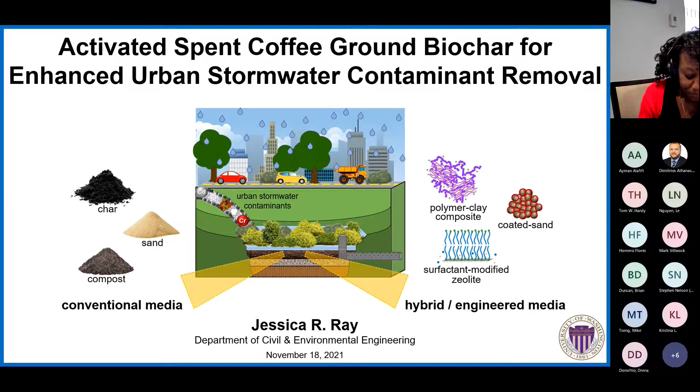To start, I wanted to put this presentation into context, starting with the hydrologic cycle, or the water cycle. When we think about rainfall, the image I think you conjure is one where you have rainfall over nice forested land, and the grass and the soil kind of soak up all the water, and you can have replenishment of groundwater aquifers and stores, this natural flow of the water cycle.

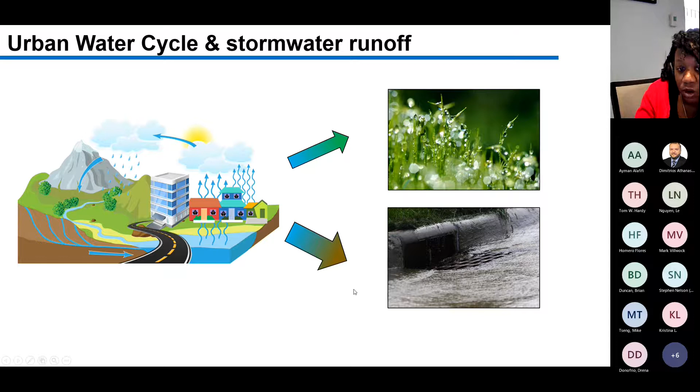But increasingly, a lot of the human population is living in urbanized, densely populated areas. So instead of having this natural hydrologic cycle where you have natural infiltration of rainwater, you instead have rainwater runoff, or stormwater runoff, onto roads that end up in water bodies. So you have less volume of this natural process and more urban runoff. This is especially true in places like Seattle, a densely populated urban area, where we have lots of impervious and engineered surfaces that, when the rainwater makes contact, lead to high volumes of runoff on the streets. And this is not just an issue for Seattle, this is an issue worldwide.

This statistic by the United Nations projects that by 2050, 68% of the world's population is going to live in urban areas. So this is going to be a global phenomenon.

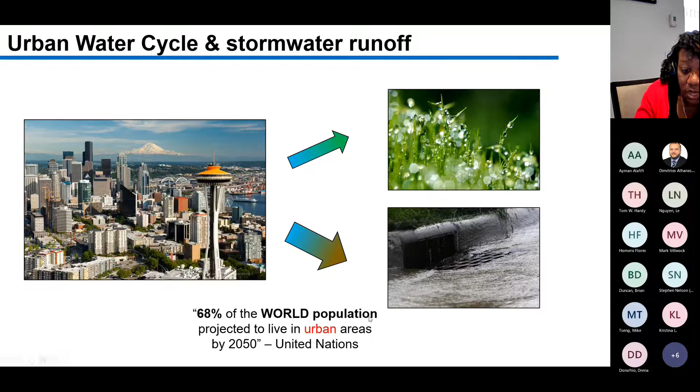Visually, this difference in rainfall over open forested land cover versus highly urban land cover can lead to significant changes in how water is managed and stored. If you take an acre of forested land cover, for example, here I stole this graphic from the King County wastewater treatment website, you can have about 800,000 gallons of water that is able to replenish these groundwater aquifers. As opposed to one acre of engineered surfaces, buildings and landscapes, you have the opposite: over 800,000 gallons of polluted runoff that ends up in the Puget Sound.

This kind of analysis exists in lots of densely populated urban cities. This alteration in how stormwater is managed and stored, or lack thereof, can lead to important implications. Over time, we'll have stress on the urban water supply as we get less replenishment of groundwater aquifer stores. We also have to deal with increased pollution associated with rainfall not making contact with open forested land, but instead making contact with these engineered surfaces.

Some other statistics I pulled from the King County website with respect to stormwater treatment and management: approximately one third of all pollution of water sources in Washington state comes from polluted stormwater runoff. This has a lot of environmental and ecological impacts, including making a lot of the salmon and steelhead runs in the Puget Sound unhealthy because of contamination from urban runoff.

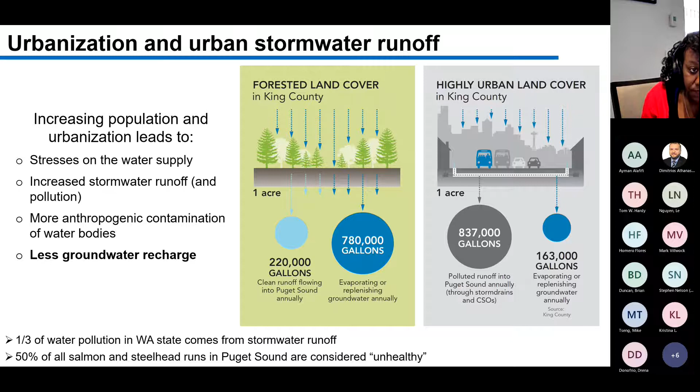This is our current approach, I would argue, in most urban cities about how we manage our stormwater. It's viewed as a nuisance, and we need to get it off of the road to prevent scenarios like the image in the top left, where we have road closures due to urban street flooding. We just need to get the stormwater off the street and discharged onto a nearby body of water.

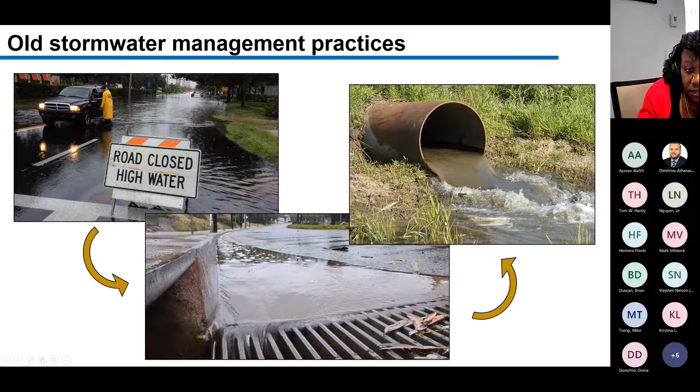But there are better ways to manage our urban stormwater. You've probably seen versions of these images around your neighborhood. There are rain gardens, or bioswales, that are installed to convey stormwater off of the street and into these vegetated systems to promote local groundwater recharge. Same scenario here: these cutouts in parking lots that are there for aesthetic reasons could also help promote stormwater infiltration in cases where you would otherwise just have pavement.

Speaking of pavement, you could also have pervious pavement - pavement that is either porous or has these open lattice networks that allow for grass to pop out. And if you are fortunate enough to have larger land areas to do some stormwater harvesting and retention, you can build these retention ponds, as you see in the top image here.

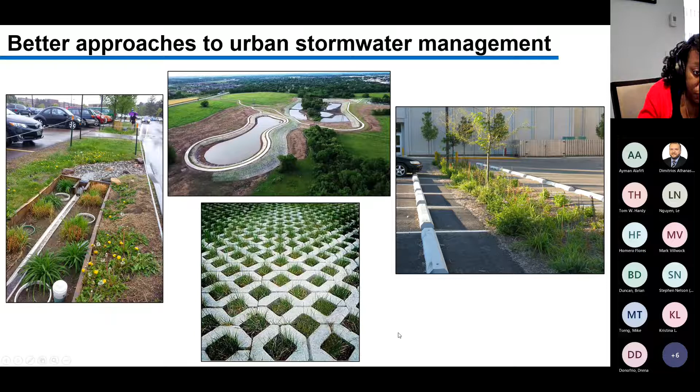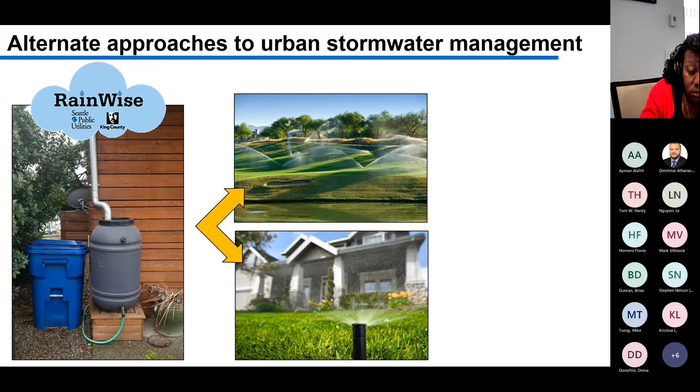This is of course where we need to be going, but we could also go a step further in terms of how we manage our stormwater. Seattle Public Utilities has incentivized residences and commercial buildings to do some local rainwater harvesting. Their RainWise program - you might see signs around your neighborhood. This is an image that I actually captured when I was out walking my dog. You can harvest your rainwater on site to then use to irrigate your lawns at your homes, or on a larger scale, we can think about using stormwater or rainwater to irrigate our parks instead of using potable water that, you know, is drinking water quality. We could use stormwater here instead.

Thinking about work I was doing as a postdoc at UC Berkeley, their water management and urban water supply is on a different level than ours because of the very likely scenario that they are under drought. So they were looking into ways to use stormwater as an emergency water store in case of extreme drought where more water supply is needed.

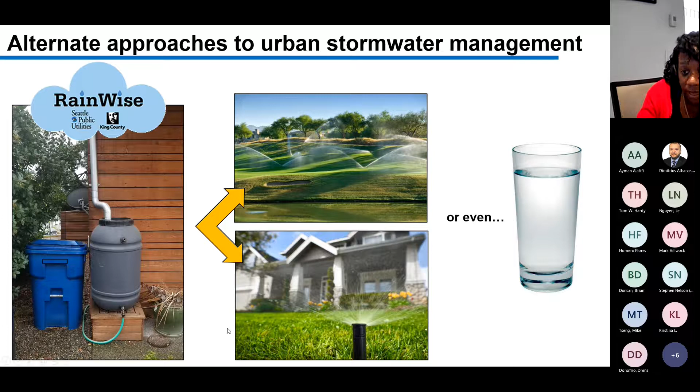The problem, of course, with realizing these more advanced approaches to managing stormwater is the presence of urban stormwater contaminants. We'll talk more about this in a second, but you can have a variety of different sources of stormwater pollution - some as blatant as dumping old chemicals and waste into storm drains. That's due to lack of public awareness about how our water systems are interconnected and how we should protect our storm drains. So this image on the right here.

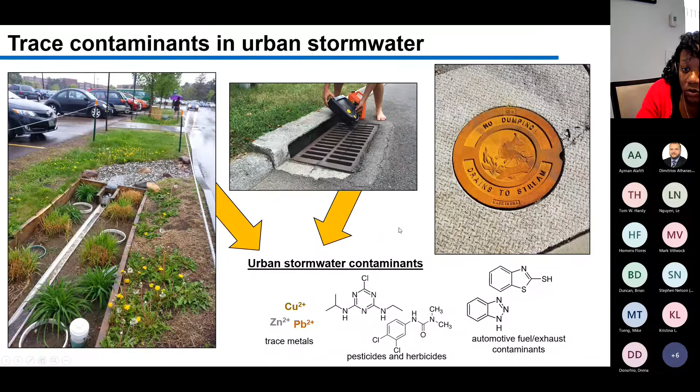So where do these contaminants come from? There are unfortunately hundreds of thousands of different compounds that can exist in typical urban stormwater. If you think about a suburb and then a more downtown urban area, there are many, many sources of contaminants that can be transported during rain or storm events to nearby bodies of water.

So here are just a few examples. You can have actual litter and waste that gets run off into the street in case of heavy storm events. You can pick up trace metals from roofing and also from brake pads on cars, in addition to other car-related pollutants like flame retardants and auto exhaust.

In more suburban areas, you can have animal waste. As a dog owner, I'm surprised to see how much dog poop is not picked up on my typical walks around the neighborhood. Pesticides and herbicides are used to keep lawns nicely manicured. Excess of those constituents, as well as excess fertilizer, can be washed from the streets by rainwater into nearby bodies of water.

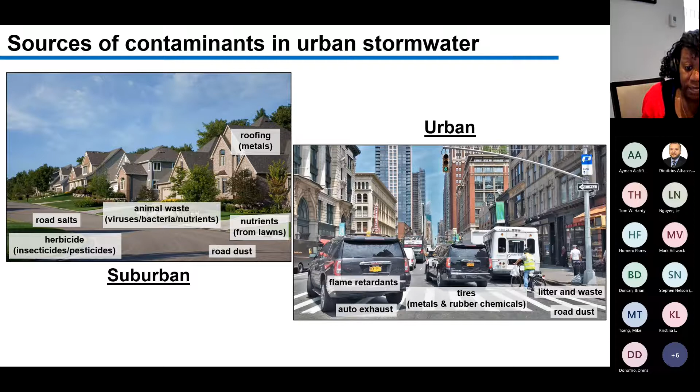This is important to consider because in most new cities, so cities built in the U.S. after the early 1900s, the storm drains are in separate piping networks from our sewage drains. So when you run your dishwasher, take a shower, clean your clothes, that piping network is usually separate from the storm drains. The water we use daily for these activities gets sent to a wastewater treatment plant to be treated, but for stormwater we don't have an equivalent, especially for these newer cities. So all of these pollutants end up in the Puget Sound or another receiving body of water.

In fact, there have been recent studies by my colleague Professor Ed Kolodziej at the UW Tacoma campus and the UW Seattle campus that have linked pre-spawn coho salmon mortality to tire wear particles that get flushed into these urban creeks where the salmon are spawning.

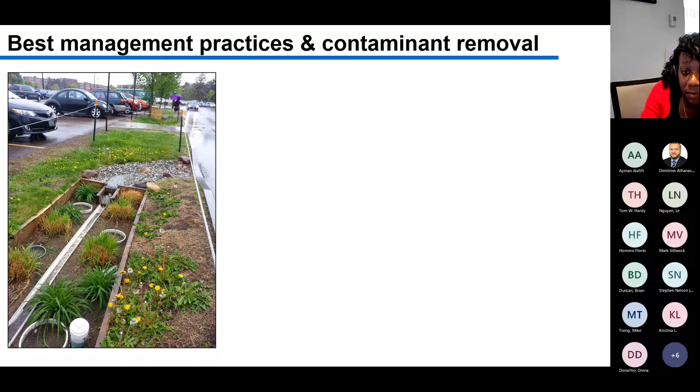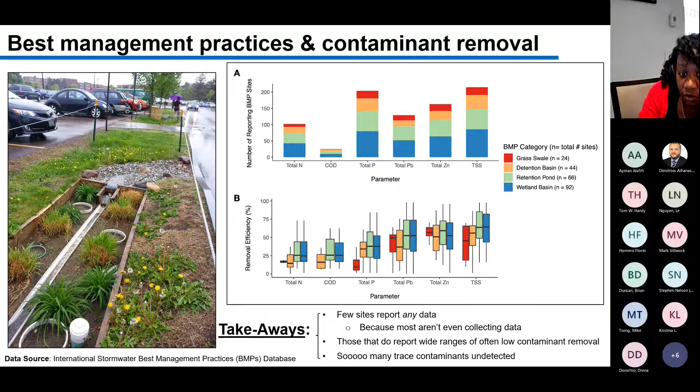So if you think about this example of a stormwater system, say a bioretention pond, where when you have rainfall and an influx of contaminants into these systems.

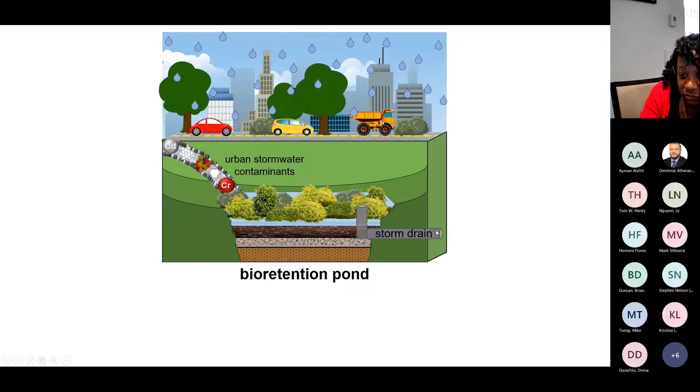These contaminants are transported through this bioretention pond and eventually out to a storm drain. You can rely on the use of conventional materials that are usually found in these systems, like sand, gravel, compost, and the microbes inside the soil that can help facilitate biodegradation of some compounds.

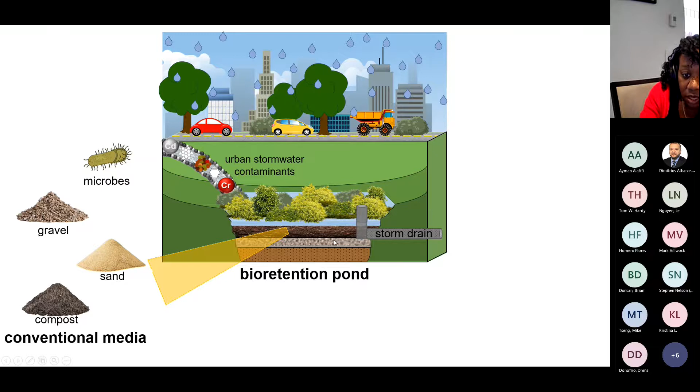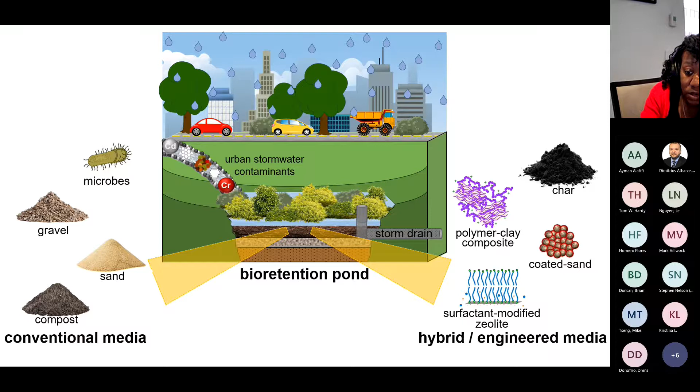But we need more, at least that's what the data suggests. So what our group is doing is we're developing low-cost engineered materials that are also environmentally benign that could be amended in these systems to improve contaminant removal.

So I'll give you an example of one material that we are investigating, and that is an adsorbent made from agricultural food waste, and it's called biochar.

The bio in biochar comes from a biomass feedstock or feed source, and you can use a number of different options. Typically, it's some compostable agricultural food waste product that you have excess amount of.

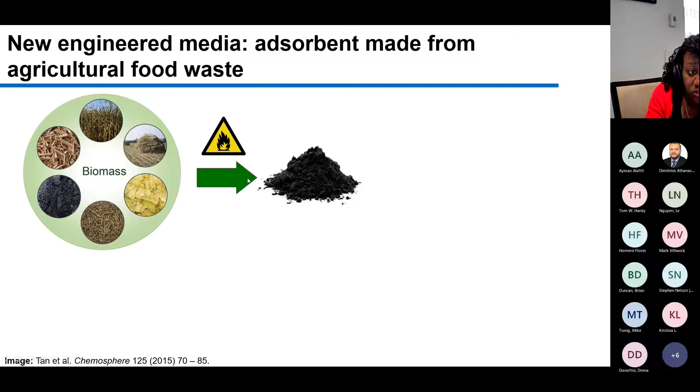You burn that at high temperature to generate a charcoal-like material, hence biochar. And for our biochar material, we decided to use spent coffee grounds or used coffee grounds.

So our particular coffee grounds for the data that I'll present here in a second are actually sourced from our dining services on campus. About 90% of it is Starbucks coffee. I want to say it's pike roast coffee grounds.

And this is a great option for us because coffee happens to be a very carbon-rich material, which is important for the ability of other biochars and activated carbonaceous materials to remove contaminants in water.

And also, we have an overabundance, particularly in the Seattle area, of used coffee grounds. In fact, Starbucks has this program that you might have seen at your local Starbucks called Grounds for Your Garden, where they literally give away bags of used coffee grounds to customers to use to fertilize their lawn.

So we have plenty of feedstock material, and it also happens to be separated from other compostable food waste as well.

And if you kind of zoom in and take an image of this biochar, this is an image that my PhD student captured. You can see that depending on the feedstock, you can have large networks of pores present in the biochar, and contaminants like heavy metals and organic compounds can diffuse into the pores to be effectively removed.

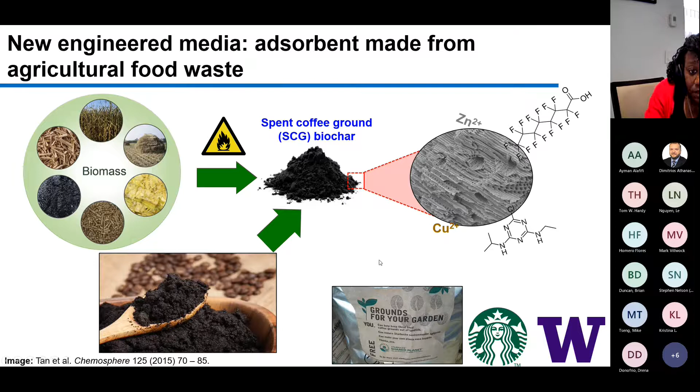So I'm going to present some data that we've collected about the biochar that we generated in labs. That's a picture of what it looks like for different contaminants that are found in stormwater.

So first, what we did was we wanted to take our source material, the used coffee grounds, and then burn the used coffee grounds at different temperatures to then investigate how well those different temperatures remove or help to remove contaminants in the finalized product.

So here we investigated temperatures of 400, 600, and 800 degrees Celsius. And then here's the surface area corresponding to those temperatures. So you can see these are pretty low surface area materials, and we were a little bit concerned about that.

And we did some preliminary testing with the different materials shown here with a representative urban stormwater contaminant, which is PFOS. Here's the structure here.

I'm sure you all are familiar or have heard of these PFAS compounds that are unfortunately very environmentally widespread and dispersed, and also unfortunately acutely toxic. And PFOS is one of the over 5,000 different types of PFAS, and it happens to be one of the most commonly detected.

So that was why we started with this particular contaminant, to investigate how well our material works for water treatment and specifically stormwater treatment.

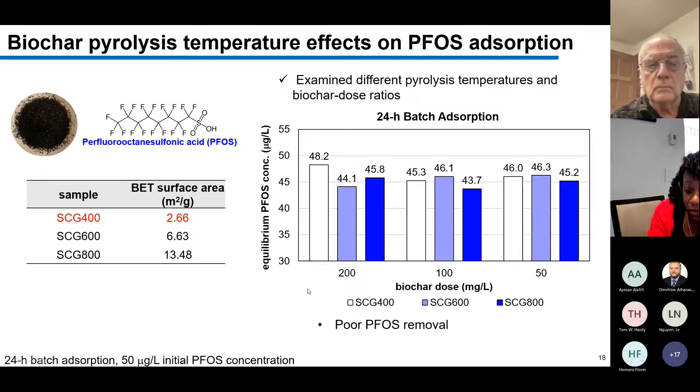The different color bars represent the different pyrolysis temperatures. We started with 50 microgram per liter PFOS in solution, and as you can see, we're getting very low removal, still measuring around 50 microgram per liter PFOS in solution. So we have poor PFOS removal, with no significant difference based on pyrolysis temperature. We hypothesized this was because we have low surface area, as shown in this table.

So what we did next was take advantage of knowledge around pyrolysis of other carbon-rich materials, in particular the activated charcoal used for water and wastewater treatment. The activation step can be done in different ways, but during activation you're creating more surface area within the material by doing an additional pyrolysis step in the presence of a chemical activating agent, which we hoped would help improve PFOS removal.

So again we plotted percent PFOS removal on the y-axis, still 50 microgram per liter, still a 24-hour batch adsorption test. Here we tested two different chemical activating agents added during the second pyrolysis step. The dark green squares indicate where we added a certain mass of sodium hydroxide, versus the lighter green circles where we added potassium hydroxide. These are both caustic materials, so we wanted to achieve this activation and increase in surface area without relying on too much of this caustic material, because we want this process to be environmentally benign and not result in extra contamination.

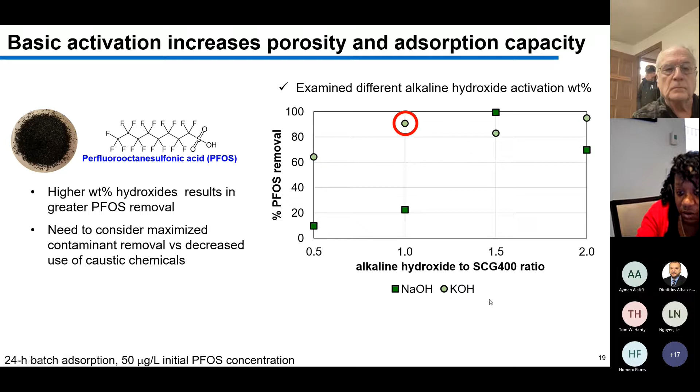We chose 400 degrees Celsius because that was the lowest pyrolysis temperature that most carbonaceous or biochar materials are prepared using. We also wanted to keep the addition of chemical activating agents low, so we didn't want to add like 10 or 15 grams of either sodium hydroxide or potassium hydroxide. We wanted to keep that low to reduce excess waste and potential toxicity, given how caustic these materials are.

So we did a second test with a different batch of coffee grounds to see how reproducible both the initial pyrolysis and this activating step are. We can see that even with a different batch of coffee grounds, we have comparable PFOS removal. That's good news. And even better, the addition of potassium hydroxide, which we're calling SCG-KOH, did significantly increase the surface area of our biochar material compared to the very low surface area of the SCG 400 we started with.

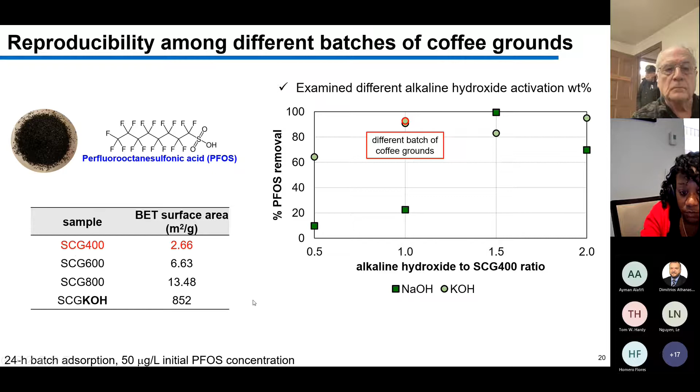That's great news. So that was some initial characterization of the activated biochar material we've been developing in my group. What we wanted to do next was start answering questions about how well this material could work to remove contaminants in stormwater.

On the left here I'm showing lab scale columns that we built. What's missing in this picture is a large tank at the bottom where tubing comes from, injected up and out the top of the column. We spiked this synthetic stormwater mixture, created in the lab with different contaminants, to mimic stormwater that would enter into a rain garden, for example.

From left to right here we have triplicate columns: sand only, and then sand dosed with different weight percentages of the activated biochar, either a 0.5 weight percent amendment or a 3 weight percent biochar amendment.

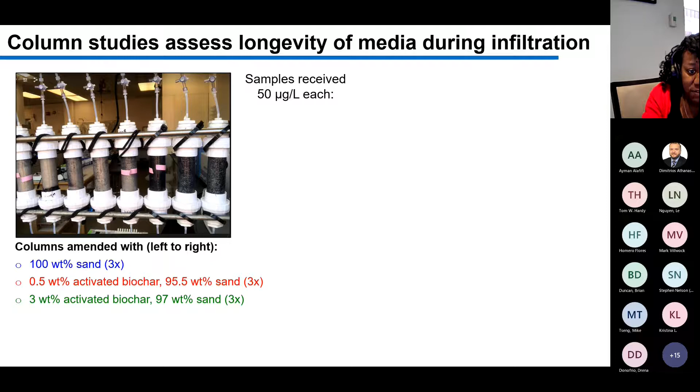The idea here is that in a typical rain garden, sand is very commonly used. If you add too much biochar, you could have adverse impacts such as clogging, which has been reported in some systems investigating biochar applications during infiltration processes. So we wanted to dose the sand with just a bit of biochar to increase contaminant removal while maintaining certain hydrologic flow patterns in a typical rain garden scenario.

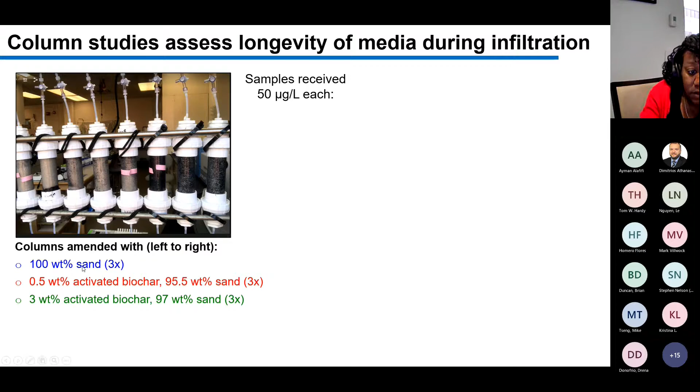This is all in a synthetic stormwater matrix that contains some organic carbon to really just mimic how well the biochar can remove compounds in a representative stormwater matrix.

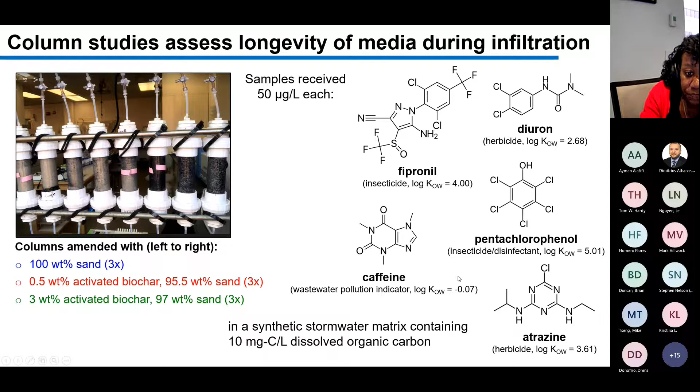Here are the figures showing the different compounds we've spiked into this synthetic matrix. We're plotting the performance of the columns in terms of pore volume on the x-axis. One pore volume is the amount of water that could be contained in our columns in their packed configuration, packed with either sand or biochar. So the more pore volumes treated, the more volume of water has passed through your column.

On the y-axis, we're plotting normalized contaminant removal - measured concentration over initial concentration present in the stormwater matrix. So low values mean very high removal. A value of 1 means that whatever contaminant you put in is coming out of the column, so no treatment.

Not surprisingly, with sand only, there's rapid breakthrough - the contaminant that enters the column just exits rather quickly. We're not surprised there; we know that sand is not great in terms of removing trace organic compounds.

When we slowly start to increase the amount of biochar in the system, we see that for some compounds like caffeine, which happens to be pretty hydrophilic, we have more or less immediate breakthrough compared to some treatment of the other representative urban stormwater contaminants.

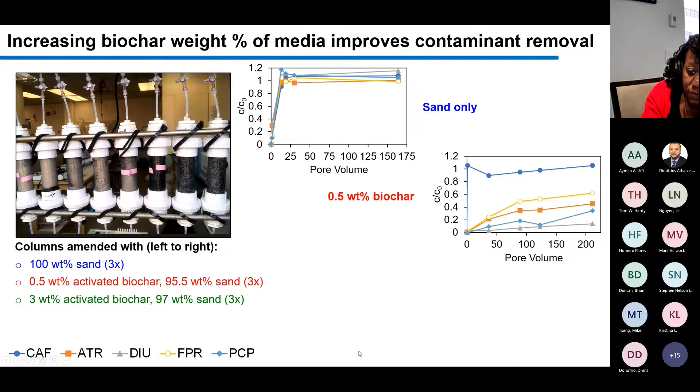If you extrapolate that further, you can hypothesize that, to a certain extent, without impacting the physical flow of water through these systems, you could add a lot more biochar and get much longer removal of these contaminants in water.

The data I'm showing here is for select trace organic compounds, and we're going to do further probing into the abilities of the biochar to remove other types of contaminants, like trace heavy metals.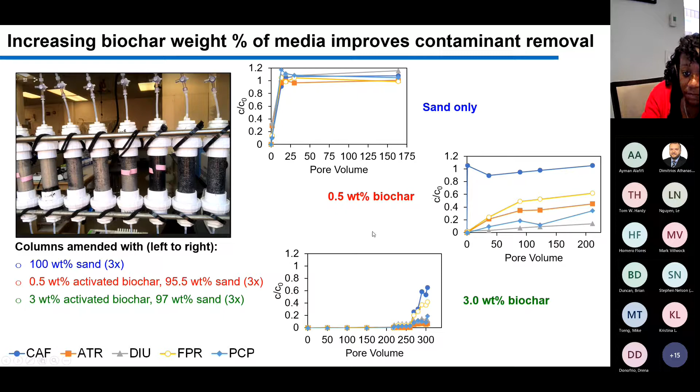We're really excited about the preliminary data we've collected so far in mimicking infiltration stormwater systems like rain gardens, and especially how it compares to materials already used in water and wastewater treatment, such as commercially available activated carbon or charcoal. Here are some comparisons between our material and activated carbon.

Using coffee grounds has many benefits, including the ones demonstrated in the data presented, but also because this feedstock is going to be composted already. So we're taking a food waste product and upcycling it into an adsorbent that could be used to remove contaminants in stormwater.

It's a new technology, but it's based on an existing material. Hopefully, once we demonstrate further its capabilities, we could think about future applications where the coffee ground biochar could replace activated carbon in water treatment systems, such as in stormwater filtration.

What we're going to investigate in the future is how to dispose of the coffee ground biochar once it's done removing contaminants. With activated charcoal, you would pyrolyze or re-incinerate the material to hopefully burn off the adsorbed contaminants and recover the adsorbent.

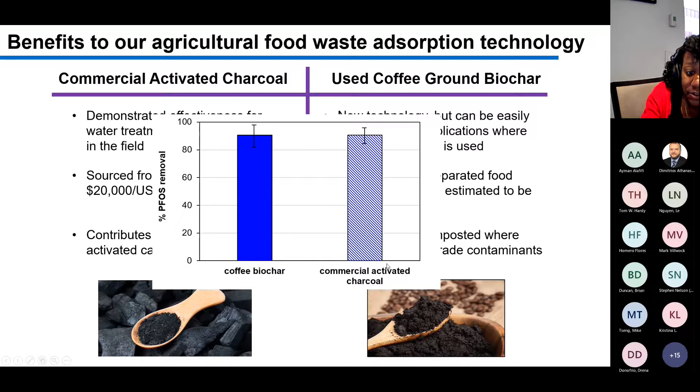We have some hope for this material because we did a test comparing our used coffee ground biochar to a commercially available activated carbon used in water and wastewater treatment. Under certain conditions, we have equal removal of compounds like PFAS, which are really toxic and pervasive in the environment. These types of comparisons we'll also be making in the future.

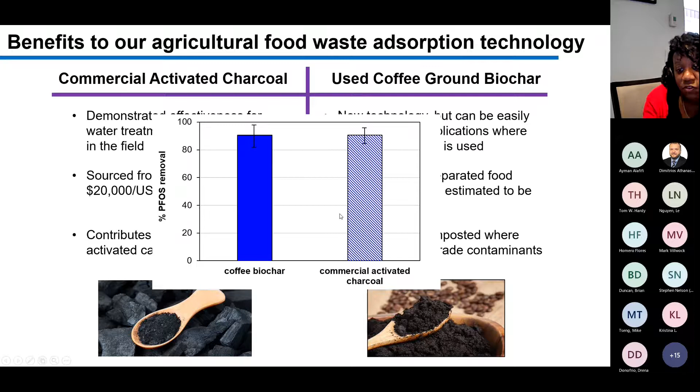In thinking about applications like stormwater treatment, we were excited about using biochar sourced from a more environmentally sustainable material, because our data suggests, as other studies on different types of biochar have suggested, that it's able to remove a wide variety of contaminants in water - not just organic contaminants, but also inorganic contaminants like heavy metals, nutrients, even pathogens can be removed by biochar, which is great because stormwater unfortunately has mixes of different types of contaminants present.

For certain contaminants like PFOS or PFAS, we're thinking a bit about specificity here, because stormwater has mixtures of different contaminants, including PFAS, and we know PFAS are more toxic and more environmentally persistent compared to other compounds. So we might want something that targets the PFAS in water, as opposed to typical non-selective adsorption like you'd get with activated carbon or biochar.

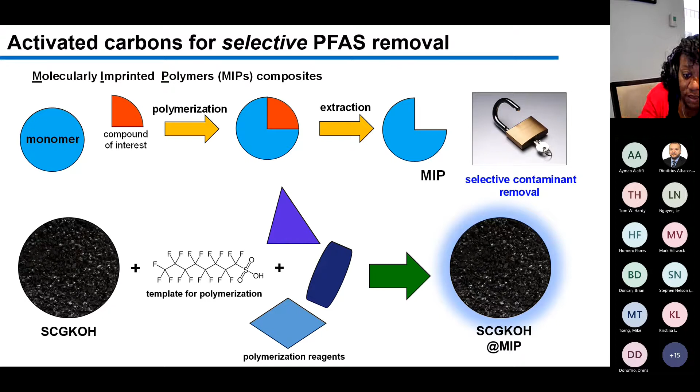Here, for example, we can use PFOS as a template compound of interest during polymerization. We add in all the other polymerization reagents, and then we can make a molecularly imprinted polymer that is coated on the surface of our very granular biochar material. That way you can have the selectivity for PFAS on a substrate that is more robust and stable in these stormwater infiltration systems.

Some next steps and future directions of this work: we want to do more testing in the lab under controlled conditions for what types of contaminants can be removed, and what range of concentrations. We can do calculations and predictions for how long the biochar would last under these conditions in a real stormwater infiltration system. We can also answer questions about what happens in the likely scenario where you have intermittent flow, where it rains...

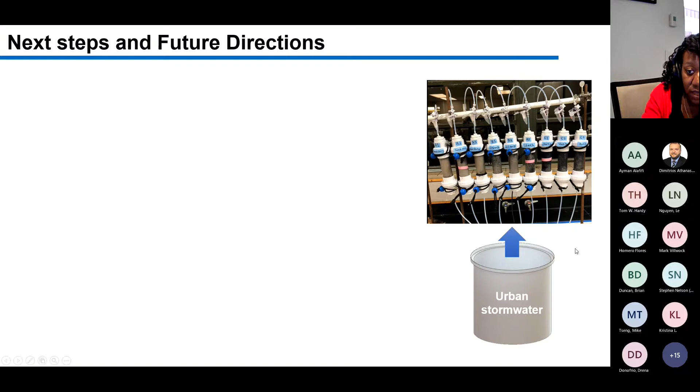...for a while and then it doesn't rain for another 3 days - how stable the biochar material or modified biochar material is under these conditions. Those types of analyses we can do in the lab under controlled conditions, with the hopes of piloting the technology in the future to do some real stormwater treatment. So to do that, we've been talking with a lot of different agencies and organizations.

The Tacoma Center for Urban Waters does a lot of piloting of new water treatment technologies. The Washington State Department of Ecology actually has a certification program for new stormwater treatment technology, so we could get this material certified, which would also help facilitate translation and dissemination. And water and wastewater treatment

divisions like King County, as well as Orange County in California, are interested in piloting new treatment technologies. Again, with the activated biochar being similar to an activated charcoal material, we think it would be very easy to do this kind of swap to do some piloting in a small-scale water treatment facility. And due to the sustainable nature of how this material is made and how it could potentially be disposed of, we have gotten interest from nonprofit organizations like People for Progress in India that are looking for low-cost water treatment technologies to remove contaminants in different water sources.

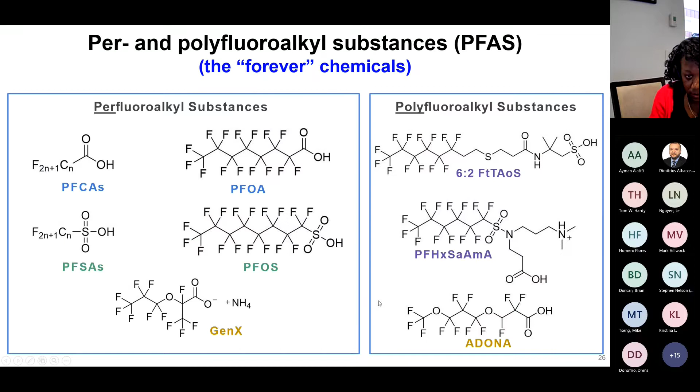Okay, I think actually that's the end of my talk. So I will stop there. If there are any questions, I can take those now.

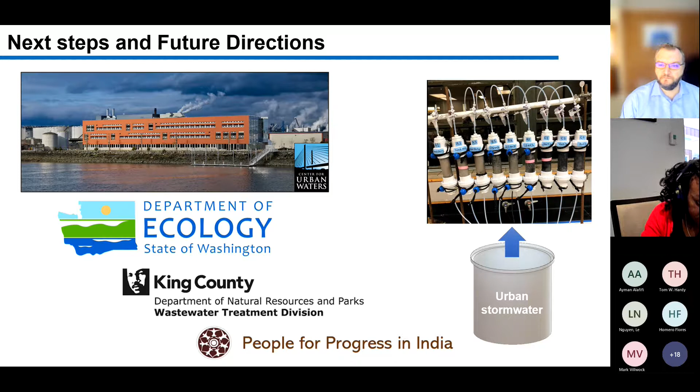So the first question, by Brian: adsorption only, or is there subsequent biodegradation occurring in the columns? Yeah, that's a great question. Right now we are investigating adsorptive-based removal, but of course we could push these systems to start promoting biodegradation of compounds within the column. In order to do that, we need to do a kind of mirrored study.

With the synthetic stormwater matrix that we created in the lab, we added sodium azide to kill off any bacteria that might be forming over time, especially because working with biochars in the past, I hypothesized it was going to take a very long time, on the order of months, before we could conclude the study. The likelihood that biofilm formation would occur is very high, which is why we added the sodium azide. So we could do an additional study where we let the system run for a while to promote biofilm formation, and then compare and contrast how the contaminant removal is improved by the development of a biofilm within the material.

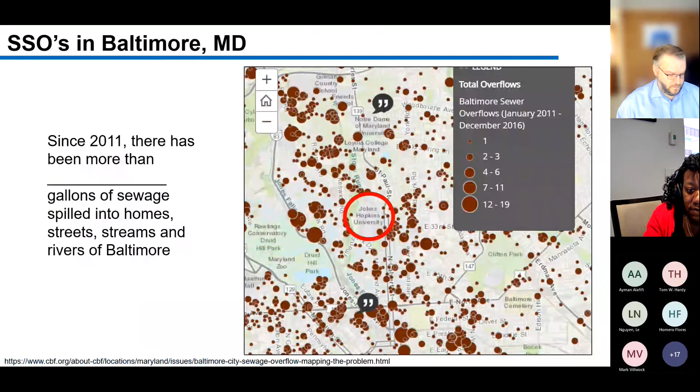So yeah, that's a great question. Scott's question: did you look at nitrate and phosphorus concentration in the effluent? Do I have that matrix here? Let me see, I had a whole bit about PFAS we didn't really talk about. Okay, nope, it's not in this talk.

That's unfortunate, I usually have a slide about the synthetic stormwater matrix. So we did add some nitrate and phosphate into our synthetic stormwater matrix, in addition to calcium, magnesium, chloride, and other representative inorganic species that you would typically find in stormwater.

We were primarily concerned, at least at this point, with the removal of trace organic compounds in the system. We do have all the samples that we collected, so we could do some additional analysis in terms of

the nitrates and phosphates that were removed in the system as well. The levels of nitrate and phosphate that we added into our synthetic stormwater matrix were what you call background concentrations. I'm more curious, in a separate study, about scenarios where you have stormwater runoff from, say, an agricultural land application, where the levels of nitrates and phosphates would be significantly higher than what we've added into our system.

So that'd be interesting to study in the future, separately from what we're doing now. One benefit of other biochar studies that have investigated applications for stormwater treatment is they do report removal of nitrates and phosphates with biochar. So that's something we can also investigate, and also potential competition with other contaminants present in stormwater.

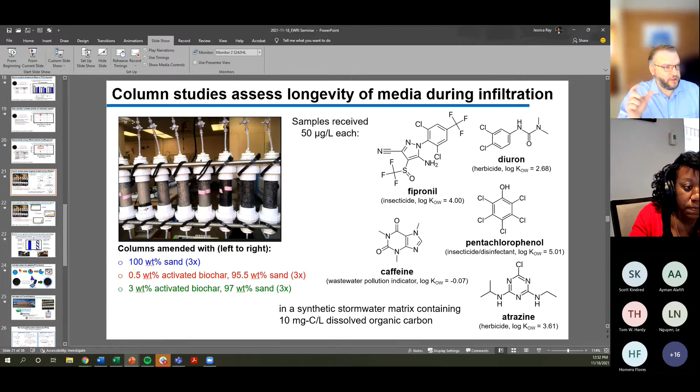I do have a follow-up question, Dr. Ray. If you go a few slides up, I remember a slide where you were talking about pore volumes - this one exactly. Let's say we have 1 cubic meter of this material - what is the percentage of pore space in that material? How many gallons would it be?

One pore volume depends on how much biochar is present in the column as opposed to just sand. For the 3 weight percent column, one pore volume at the flow rate we selected, 1 millimeter per minute - comparable to stormwater infiltration rates in a real rain garden - the pore volume is about 80 minutes. So with 1 pore volume about 80 minutes at that flow rate, you can convert that into volumes of water treated. For the 3 weight percent biochar columns, we're at about 200 to 250 liters of water treated, and this is still ongoing.

These are part of the calculations we're doing, so we can model a typical rain garden system with a certain area and depth of a biochar-sand mixture layer, and calculate, at least based on conditions in this study, how long the biochar's lifetime would be before needing replacement. Based on rough calculations, we're getting theoretically decades of performance with a very low amount of biochar. We have so many different research directions and questions about how well this material can perform and how we get to that next step of implementation.

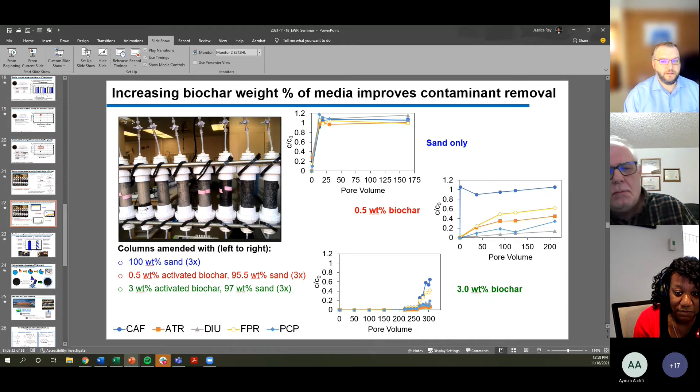Oh great, thanks for that information, that's really helpful. That'll be helpful thinking about disposal mechanisms for the used activated biochar we're investigating. If we can find ways to get the composting configured so that we get degradation of the compounds adsorbed into the biochar as it's composting, I think that would be a significant gain for application of our material, as opposed to regular activated carbons that are just re-incinerated or re-pyrolyzed to degrade contaminants and then reactivate the material.